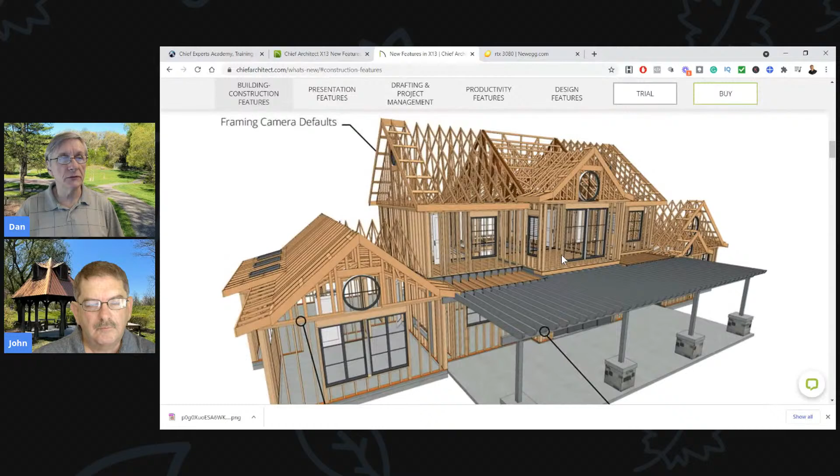This page is really nice. It talks about and shows some of the new features. They've got some really nice videos on here that will steer you in the right directions on some of the new things, and we'll refer to some of these. They've done such a wonderful job laying out some of these things, and they're just killing it as far as teaching what they're doing within the software itself. So pay attention to what they're doing and you'll learn a ton.

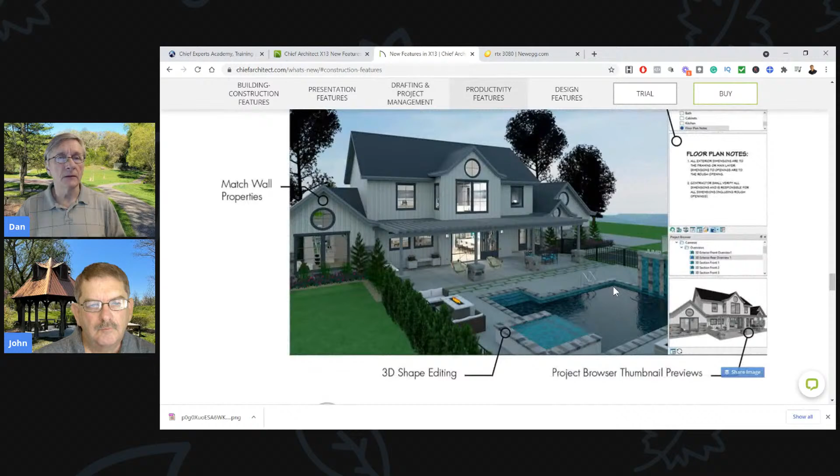We'll keep bringing you good stuff too, but pay attention to what they're doing. So there are presentation features, new things you can do on elevations, project management features. They are really listening to the users out there and doing a nice job.

Now, another thing I want you to be aware of - here's some of the system requirements. I'll talk about that for a brief second. In X13, you're going to need some new hardware if you haven't upgraded your computer to the newest video card. When you say that, Dan, are you saying you'll need new hardware to use all the features, or just new hardware in general? You'll need new hardware to use some of the new features - the software will perform the same as X12 and previous versions on your existing system.

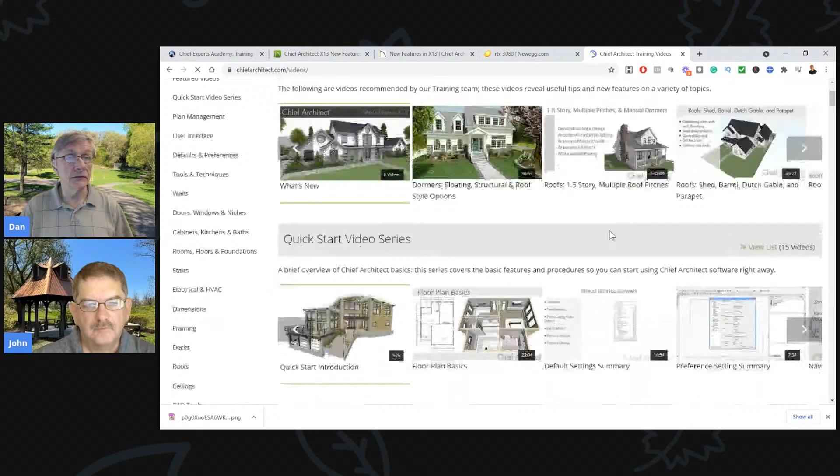So when you go to their website, go down to training videos and scroll all the way to the bottom, that's where they post their weekly shows that they're doing. And they're doing a great job there.

But there's also, what's going on there, John? You got some background noise there? There you go. Thank you.

But there's a lot of great software, a lot of great videos here that you can watch. Again, it seems like they've been doing this for a while, but especially since COVID hit, it's like they all hunkered down and just started producing a lot of great things. So they've got a great team working on all this stuff. I know there's a lot of people putting this kind of stuff together over at Chief Architect. So kudos to them for doing a great job of helping you guys learn how to use the software better.

All right, with that in mind, John, we getting any questions here? We got comments there and stuff. Yeah, Jerry wants to know about pole barns, material estimating, material per, yep.

All right, cool, so if you guys have questions, put them in there and we'll try to get to those. So what I've just done is I've taken a Word doc and I want to run through some things. We don't have much time here. So let me run through some of the things that, John, I was telling you — a lot of these are the kinds of things that as I'm using the software and I get to a point, it's like, damn, I wish Chief would do this or fix this or give us this option. They've done a lot of that in X13.

So I would give X13 a really high mark for some of the new features that they put in. So let's just kind of run through some of those. Let me get into the software here and just talk about some of those features. So let me just quickly go down here. So first of all,

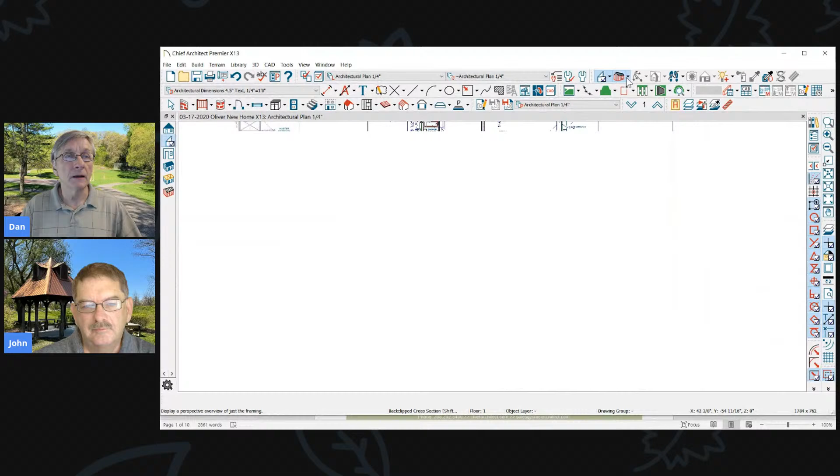Hallelujah. All right, navigation alt mode. That's just a real simple thing where when you're in a 3D view and you rotate your mouse using the right mouse button, you see how it changes the rotation up and down. So you're just getting more rotation options with that fairly simple thing. But again, it's just a nicer way to get around your 3D model.

Fill the screen to the selected objects. I didn't even realize this would be a good feature until I was exploring some of these things. So when I'm working on something in Chief, let's say I want to select the kitchen cabinets there.

So I click on, I go in here and I click on, actually let's do a light. So actually that's not what I want to do. You have to bear with me as I prepare for this. I spent about 3 hours before this going through all this stuff. I probably forgot half the stuff I was exploring when I got in there. So when you click on something like a cabinet or a group of cabinets, let's say I've selected these cabinets right here.

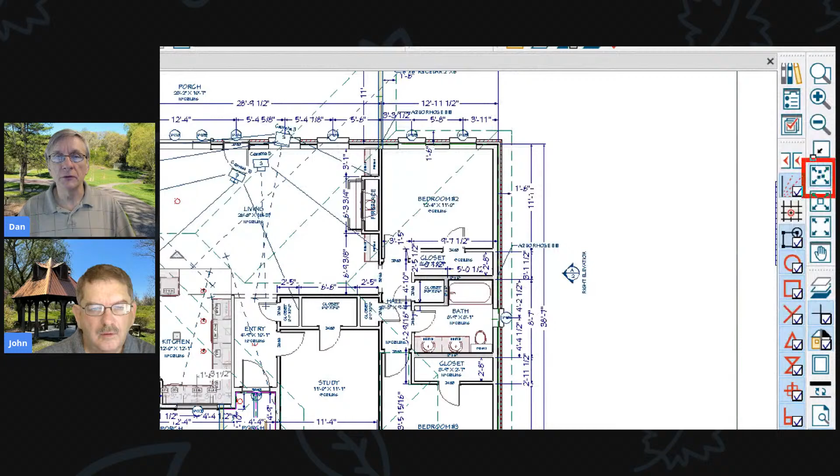There's a new zoom feature right here that allows you to zoom into your selection. Kind of a handy thing. So when I want to zoom just on the things I've selected, bam, it takes me right there. Just a little bit less scrolling in and out when you select things. So if you have a big project and you want to work on a room, click on that room and hit zoom to that selection, and you'll be right there.

That's so cool. Yeah, I like that. I think that's a good one.

All right, the polyline solid defaults. How many times have you gone into an elevation, John, and drawn a polyline to fill in a wall or something like that? And what do you get every single time when you do that?

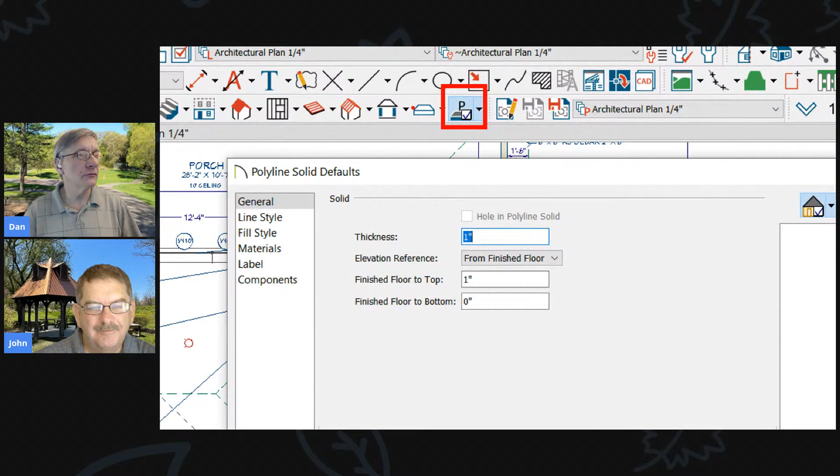Concrete slab. Yep. Well, now you can double click on the polyline tool, this tool, and this tool as well, the slab, and you can specify how thick you want it to be, where it is from the finished floor, how thick, and what kind of materials are on that thing, line style, all those different things.

So if you're working on a bunch of things, maybe a bunch of terrain or something like that, change your defaults while you're doing that and you'll be able to continue that. So what I might do is open up this box and say I want my fill style to always be solid black, and whatever else it is. Oh, that's a slab. So once you've set one the way you like it, click the little wrench icon down here, and that will make it the new default in your plan. So the next time you go draw one, that's what you'll be drawing.

So I've had that forever. I know. So if I click that and then draw another box, I guess I didn't do the fill style, let me try that again. So if I go in here, I thought I changed fill style, I must have changed the line style. So again, I'll set that as my default. So the next time I go draw one of those, it should be a solid filled black box. Bam. So that's kind of a nice feature. I like that a lot.

Not a big deal, but it's a little big deal, like a lot of these things are. These little things add up. Multi-select and edit rooms. How many times have you gone into a room, John, and highlighted a room and said, God, I wish I could change the ceiling height in a whole bunch of rooms by just selecting them, or changing some of the materials or something like that.

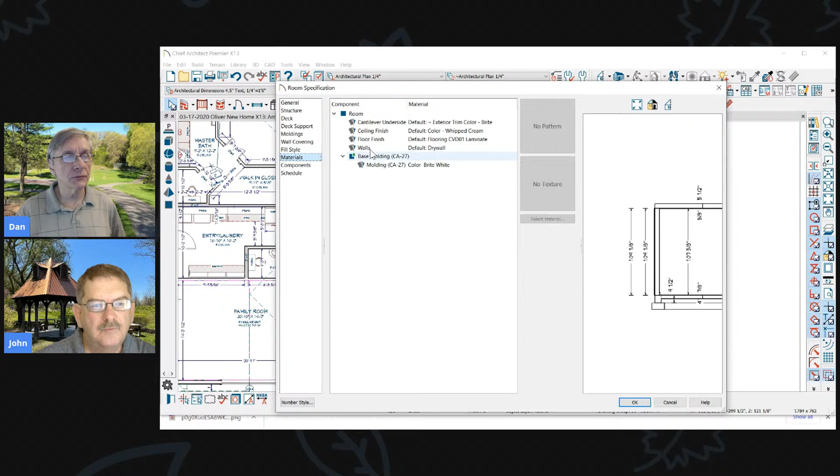So now you can group select rooms, and I could then open the dialog for those rooms, and you'll be able to edit more things: ceiling height, floor height, materials, the moldings. So we could never do that before. It's my understanding this was a pretty big deal for them to get this to work, right? So kudos to them, they got it to work. And it looks like we can also do wall coverings.

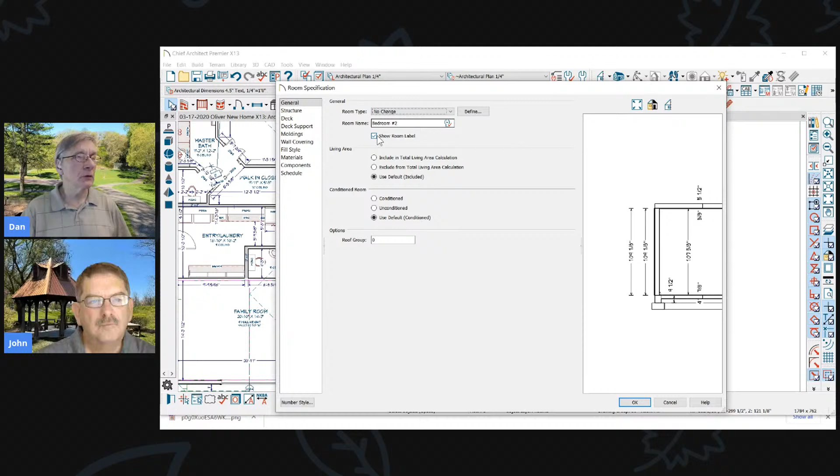We can change the fill styles for those rooms, materials. We can't change the component. Oh, we can change the schedules to what that room schedule is going to be. And so there are room names. You can change the room names. So if you want to rename a whole bunch of rooms all at once, you could do that too. So there you go, that's kind of a nice feature. I like that, group selecting of those kinds of things.

Michele asked, just to clarify, I have an NVIDIA Quadro RTX 3000. That's not good enough. It should work okay, Michele, but it's not going to be the speed of an RTX 3080. I didn't know they made an RTX 3000, that must have been an earlier release. My best thing, all I could say is get X13, bring up some renders and see what happens.

I'm not going to cover rendering, but what you would do, I'll just show you real quick to test that, is to bring up a 3D view, go to the rendering dropdown, the different types of cameras, and check physically based. I believe it's this one, and you're going to be looking for it. I don't think it'll show up on my screen because I don't have that card here. Shoot, I don't remember where it was because I wasn't going to show that today.

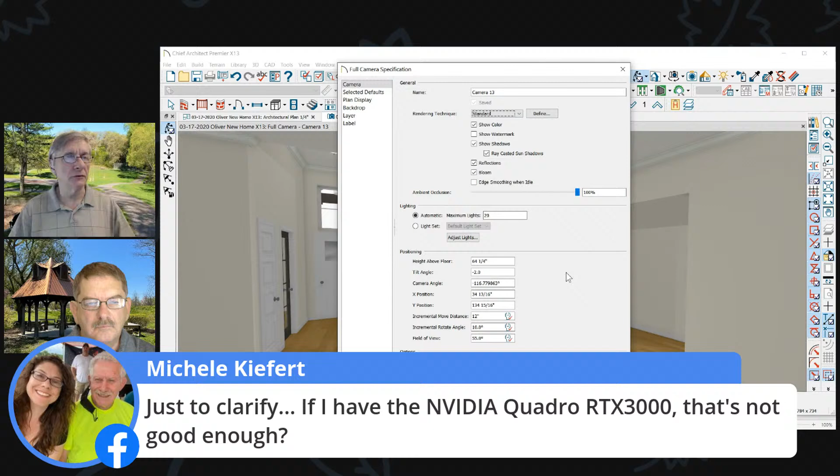You'll see it in the defaults, you'll see a thing, it'll be here. It's probably not on mine because I don't have that video card on my computer, so I can't run that kind of option. It'll be an option here that you'll be able to show that. So if you watch some of the chief videos, they'll show you how that works, and I think they'll be able to help you a little bit more than I can, because again, I haven't been able to do any of that on my computer, and I don't do a lot of drawing on my laptop.

All right, next item that I've got on my list was match properties on walls. Use the select same wall tool to quickly do it.

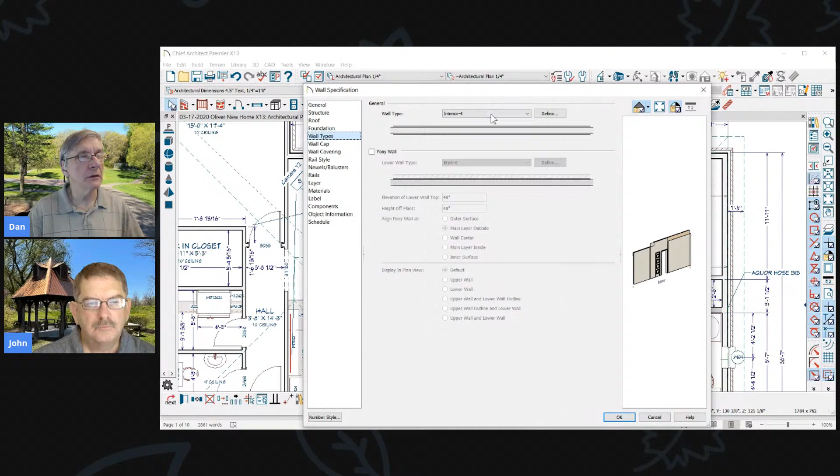Okay, so if you've drawn some walls in your plan, let's say I've gone in and I've changed a wall type here. Let's go change this wall type to something else. So I'll go to my wall types, and I'm going to change that to interior 6, right? It's not really what I wanted. So what I could do now is I could take my wall type, click on the wall types here, or the match properties tool, this little icon right here, and I could click on that wall, and I could go into my menu here, and I could say wall type would be this one right here. It's the Fire 6, which that's not really what I would do.

And now I could click on this icon. This is your little paste icon now with this wall type. So I could click that, and then I could go change other walls to the 6-inch wall just by clicking on them, changing them out. So that's really a handy little feature.

That's pretty huge for me because I've always wanted that to be able to do it with walls, but it wouldn't before. I mean, you could do the same thing by group selecting a bunch of walls and then just open the dialog and change them. But if you're in your plan and you go, oh shoot, I need those walls to be that wall—and the thing I don't like about Chief, this is one thing I wish they'd do, is put the name of the wall on the toolbar down here instead of me having to open the wall to look at what kind it is, what it's called.

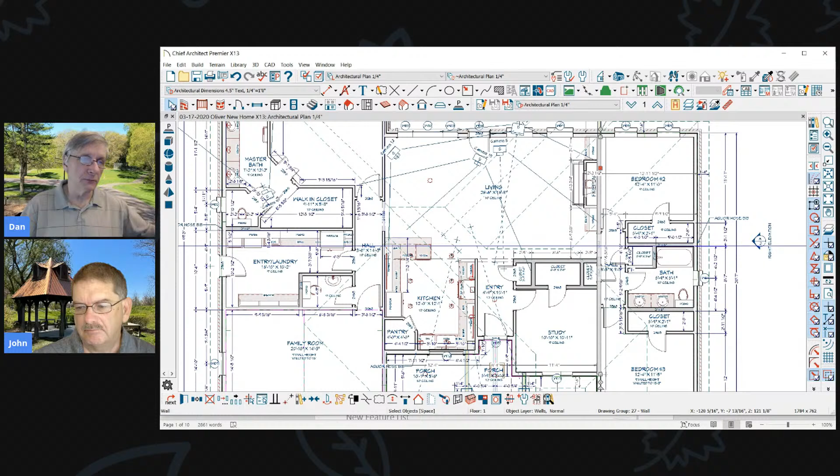But this select same wall type will make it easier just to put that somewhere else instead of having to look up the name. Anyway, so that's a new one. I like that one a lot.

Let's see, match properties, control living area label display. That's more of a, it's not a big deal, but when you want to show the living area on your plan, people will go into the layers and they'll say, well, where's the living area here? Okay, so if I search for living in my list here, there's no listing for living area. So it's one of those things Chief puts in your plan automatically, living area. And you control that by going into this icon right here, the select objects icon, or you could go to your defaults and go to plan.

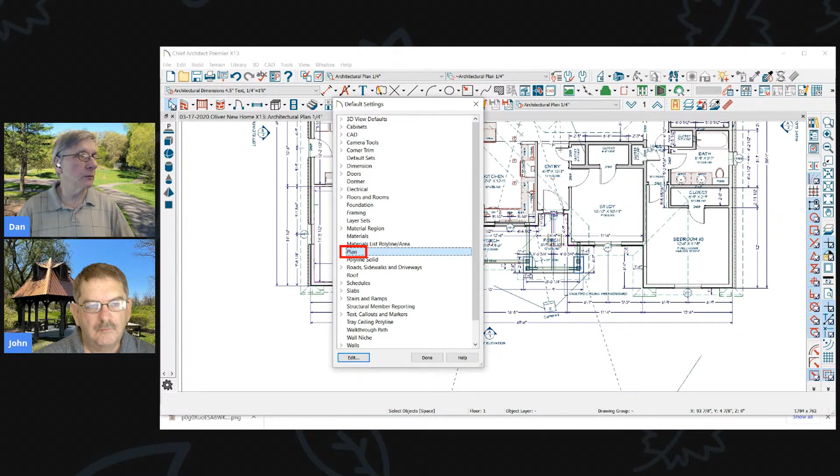This is the same as double clicking on that. So you can get there either way. When I go here at the bottom, show living area label on or off.

A lot of people just move it to the side or they put a whiteout box over it, but that's actually how you shut it off.

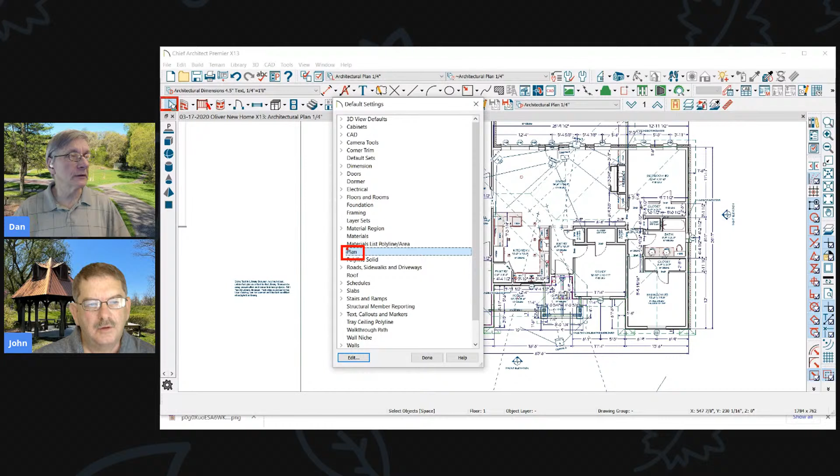What did they change about it? Because you could do that before. I think what they changed is they added this into the defaults area. I don't think a lot of people realized you could actually click on that icon. I think that's probably something tech support got a lot - how do I turn that off? Because no one could find it before. If you didn't know you could click on that icon, you had nowhere else to go to find it. Now you've got it in your defaults.

Not a big deal. And while we're on the topic, if you ever want to find out what the square footage area of that living area is - where you've got a number and want to know where they're getting that number from - this isn't new, but you would click on this. Highlight the outside of your plan and click on this icon. That will put a box over your plan showing where it's getting that living area square foot number. So when I open the dialog for that box, here's the area, and this is the same amount that would be displayed in that living area amount. It would probably say 2451 square feet because it rounds up. Anyway, just an FYI about that.

All right, refine search in library browser. How many times have you looked for a kitchen sink and couldn't find one because you got a list of 5,000 items, if you have a lot of library items loaded?

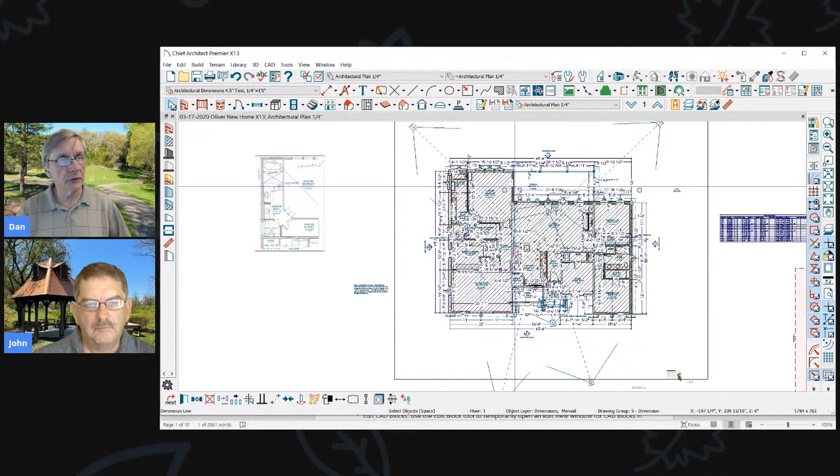So now what we can do is use and, or, not, and parentheses to refine your search. I really haven't even gotten into this at all. So when I open my library of symbols and type in kitchen sink, let's see how this works - the way I've always done it in the past. It's going to search through it. Oh, I got to put a space in there. So now it's going to search everything that finds kitchen and sink. But if I put parentheses around that, it'll narrow it down so the item has to have kitchen sink somewhere in its label, in the data's description of the object.

So now I'm getting a lot less items on my list. And if I go - I think it was 'and' - stainless steel, yeah let's try that. And kitchen... nothing. Okay, so like I said, I'm going to start researching how this works, because it's going to work a lot like a Google search, like you search for websites. You can do a lot of these same things - you can narrow down your search.

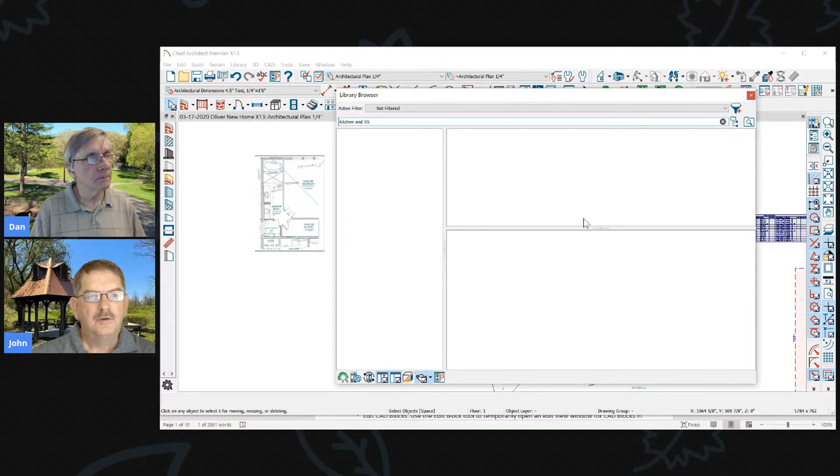SS - but you still have to spell everything perfectly. Yeah, so here it found anything with the word kitchen and SS for stainless steel. So now I'm getting stoves and all that kind of stuff. So we'll have to work on that.

But you can see that Chief has done a lot of work making it easier to find things in the libraries. There's, I think at last count, 420 libraries loaded up in my system - I need to go download, I think we've got another 10 or so that I haven't downloaded yet. So there's a lot of libraries, well over 100,000 plus items to search through when you're searching for things in Chief, and that's only going to grow and grow and grow. So we have to learn how to find things in our library a lot better. We'll keep working on that.

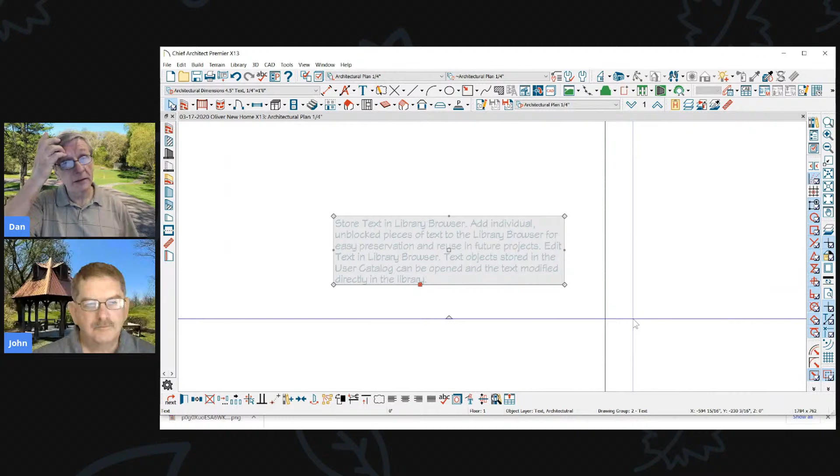Store text in the library browser. I really love this one, this is so nice. So when you're in your plan and you've got some text that you'll use again and again, it used to be you could do that by blocking it up. You'd group select it by holding your shift key down and make a block out of it, then put it in the library. Now you just click on the text and add it to the library, and now it's just in the library as text.

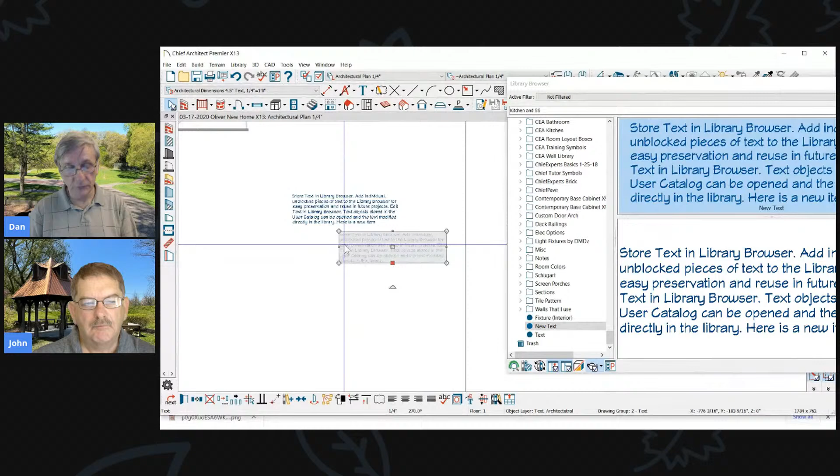What else you can do is click on the word you put here. So I'll just say, here's some new text. You can click on this over here, right click on it, and open the object from the library without having to put it in your plan. So if you need to make a modification, here's a new item - I just added that, and changed the text while it's in the library. I didn't have to put it back in the plan. Anytime you want it back in your plan, click and paste, and you've got a text box you can edit again. That's really cool. That is a nice feature - we don't have to put it in our plan, unblock it, and do all this other baloney. It's just in the library as text, out of the library as text. Nice feature, I like that one a lot.

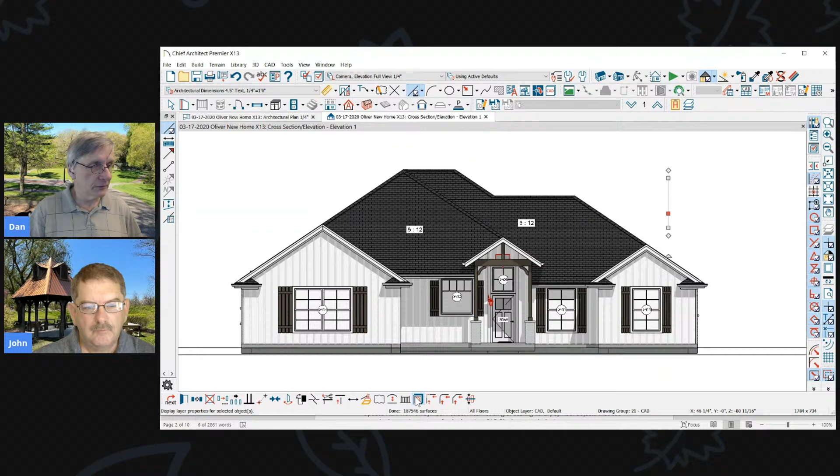Center CAD in elevation views. Okay, I'm just finding some things out here that just came to my attention. Let me show you what those are, because I could be mistaken, but I don't think I am. So when I bring up an elevation of this building, I can now draw CAD on here, and I now have all of the same CAD tools I have in my plan. I have trim and extend - so if I wanted to trim or extend a line, I didn't even realize I couldn't do this before in an elevation view, but apparently we never used to have any of these tools in our elevation view. It shows you how much I've just gotten used to not doing that kind of stuff in elevation.

But the other thing I've noticed is if I want to draw something here, look, I got snapping now. I don't know if this is new or not, maybe I was just missing it, but there was some snapping you could do. Yeah, so it seemed like there was more. Sure, there's an endpoint there. It still seems to be missing some, but it seems to be better. So I do know we'll be able to do more snapping on cabinet elevations. So that seems to be better.

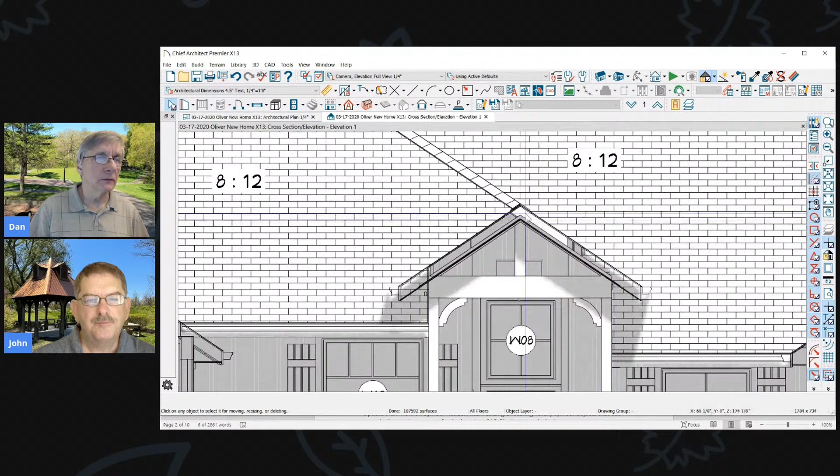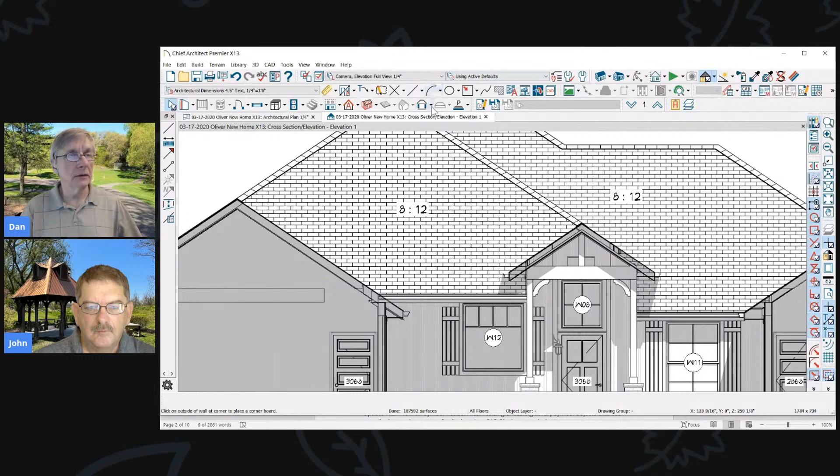What I would always tell people to do when you're working on something, like you want to draw something on this wall and you want to snap to the fascia or the soffit, is cut through the object, cut through the roof plane, so you're exposing the edges of an object. So when I turn the color off here, now I've got snapping everywhere, just like any other CAD object. Because what Chief was really doing there, my understanding, is it's actually putting a CAD line over the surface of those exposed edges. But it doesn't do that to the full elevation views, although it looks like it's doing more of it now. So anyway, it seems to be better. Not totally perfect yet, but it's better, which is better. I'll take better all day long.

There's a question about the text, putting it in the library - can you do that with rich text too? Yeah, any of the text. Okay, let me go here and try that real quick. So rich text, we'll type some text here, click OK, click on it, and hit add to library. Bam, there it is.

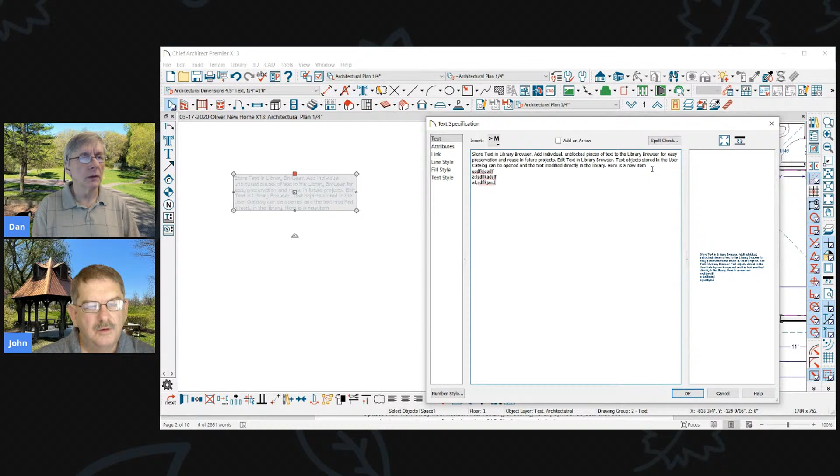And you can change that in the library too. So I could go in here and open that object and change the font, the color, the size, all the aspects. That'll be handy for making some of those schedules people like to have - their own schedules. Now, I don't know about spreadsheet kind of things, if it'll work, but the way you could do it, like here, if I go into this text and add another line and add some more lines, you could go to attributes and display the border and display it as a grid.

So you could make it look like that. And if you put a tab after each of these items, you'd have another grid. But now we can add that to the library just like that too. But it's still just a text item with the grid turned on.

So it's probably no different than if I threw a schedule in. If I went to the schedules up here and grabbed a door schedule and popped that in my plan, and I convert it to text by clicking this icon right here - schedule to text. Now I'd be able to add that to my library like that.

Now if we create that, does it change as you change things or not? No, that's not part of the plan anymore. It's just text, it's not linked at all. And I don't think we can add just a plain schedule to the library. No, we don't have any options.

Can you put a title above it, block it with a piece of text, and then put it in there? Yeah, you can still group items together, block them together, that kind of thing. Can you block a schedule and some text together and put that in the library? Yeah... no, I misunderstood you. I don't think so. Let's find out.

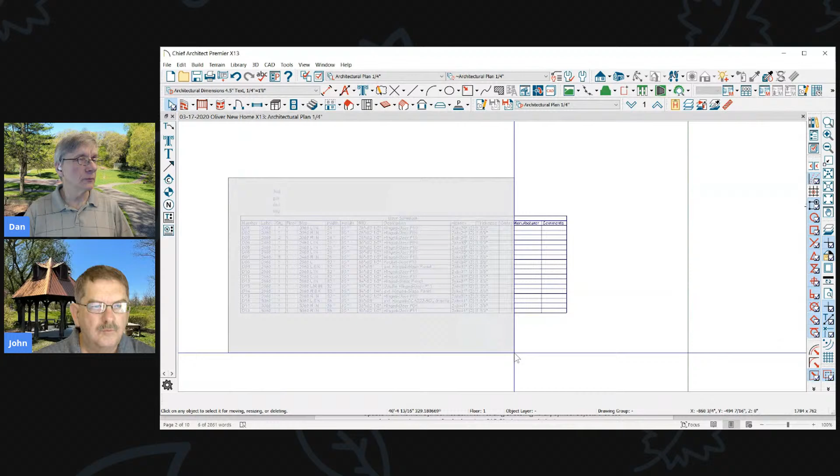Because the schedule is going to be a live item. So there's some text, I'll group them together - no, actually block it. And if I select the block and add to the library, it got the text but not the schedule. Yeah, that's right.

Can notes be added to the library? Notes, can they be added to the library? I doubt it. Let's find out.

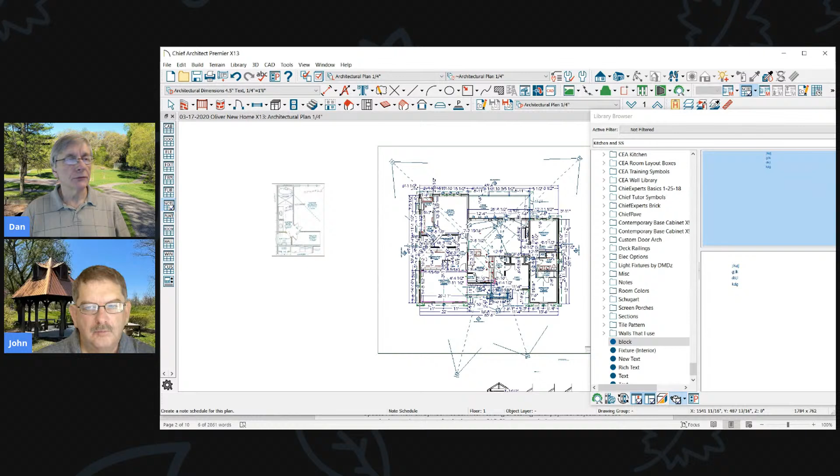Let's go add a note schedule. All right, schedules, note schedule, click here. Let's go add some notes. I must have a note schedule here in one of these views, let me go to it. Let me go kitchen and bath. Yeah, here I've got a kitchen and bath note schedule right there. Let me go add a note.

Okay, click on that, block it. No... oh, let's see, what does it do? It added the schedule, but not the notes that are part of it. But it'll put those notes back in when I put it here. So kind of - I guess we could experiment with that one a little bit.

It'd be nice if we could set up a bunch of different ones. How about the individual note, like the number - what if you save that to the library, what would happen with that?

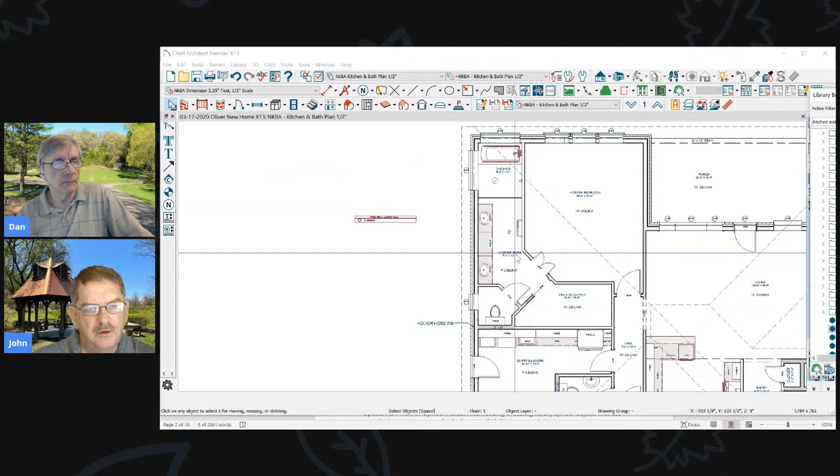Oh no, I don't think I typed any text. No, I did type some text. Because we don't have a number there. I'm not sure. It did - it added the note itself, but not the... bring that back in, does it put the... so it did bring it back in. So yeah, maybe it might be something worth looking at if that's something people do.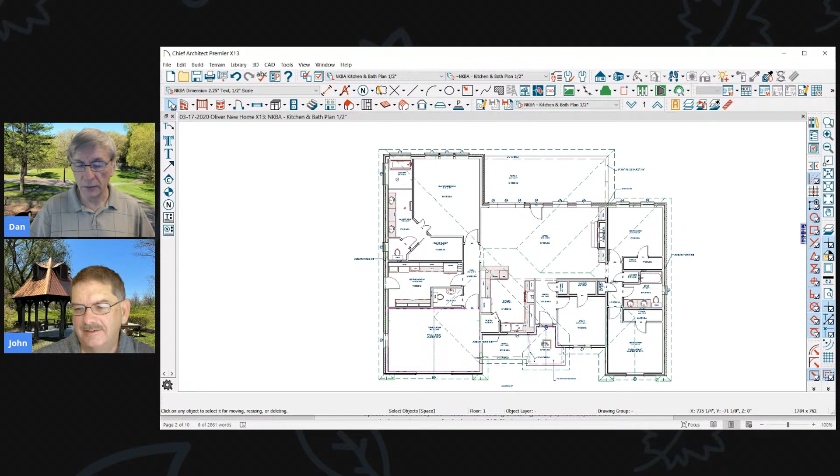I could see this adding text to the library thing being a big deal for the layout when you want to do all sorts of different callouts and things like that on your elevations and all this kind of stuff.

So, MM2's comment there at the end - it's fun seeing all you kids. Told you, the candy store, Mike. All this new toy, yeah. This is kind of like watching my kids on their gaming stuff, because they - why won't the note go off? Yeah, I mean they'll watch YouTube videos on how to run their games better, and it's just, yeah, so this is our form of gaming.

Add text to library, center CAD and elevation, copy and center objects - I don't remember that one. Trim and extend CAD and elevation view, talked about that a little bit. Slab defaults, we talked about that. Convert planes to polylines - this is really a big deal for me, even a big little deal.

It's not a super deal, but let me show you what that means. So have you ever had a plan where you're doing a roof layout, and you want to show all of your roof lines in one plan, but you need to keep some of your roof planes on the first floor because there's skylights in them? But if you move the roof planes up to the second floor, the skylights won't show up in the interior anymore. So those kinds of deals.

So what we could do with Chief is, let's pretend for a minute that I need this part of the roof to be on a different floor, but I want to show all my roof lines in one plan. I could select some of these roof planes and copy them to a different floor, hit copy, go up or down to a floor, paste and hold position. Then I could click this button right here, which we couldn't do before, and just change them to CAD lines.

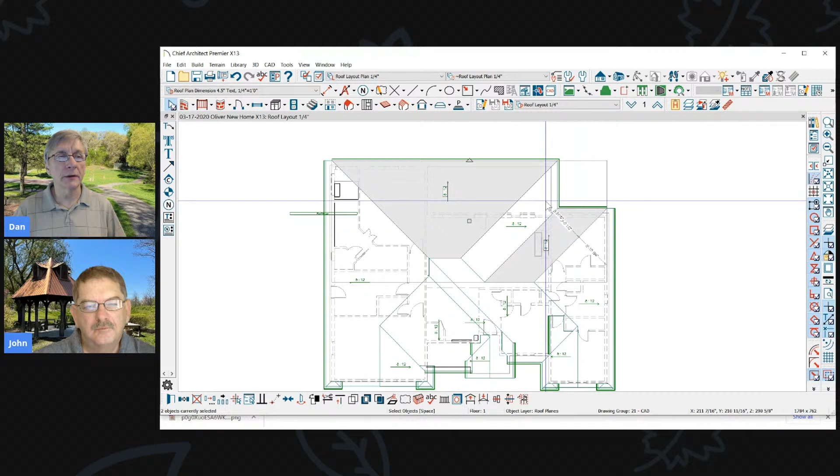Correct. So what I would do in the past sometimes is take these roof planes and copy them into a separate plan, paste, hold position, copy, then hit convert to CAD, and then copy and paste them back into my plan where I needed them. Now I've just skipped all those extra steps, so that's kind of a nice deal.

Not a big deal, but it's one of those little things someone picked up on and thought, oh yeah, that's an easy thing to add, we could do that. And you can do that from elevations for walls and stuff like that too.

No, I don't think so, I think it was just roofs. There's roofs and one other thing that was part of that. So I can't see, I don't have any of that, I don't have that ability here. Here I could probably... nope, can't do it. Can't do it here. X13, yeah, there you go. So, but just on the floor plan, we can do it.

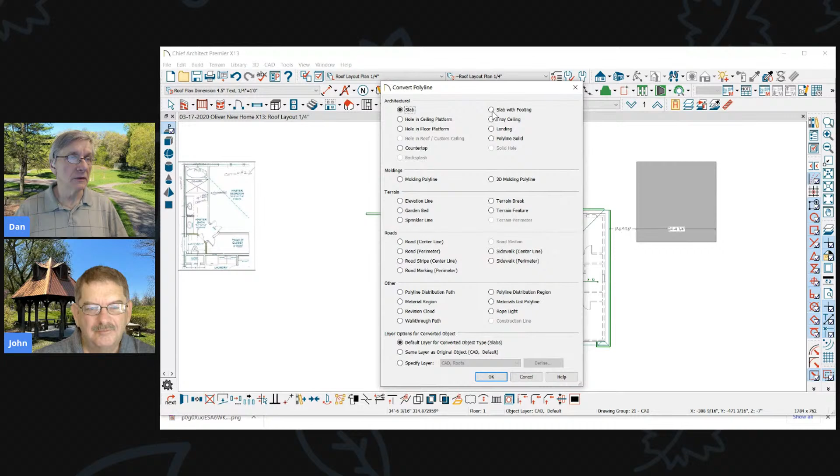Just trying to think of any other examples where that might be handy. Because we've always been able to take 3D objects and convert them back to 2D objects and then convert them to something else. I don't think I could take a roof, convert it, and then convert it back to a roof, I don't think that's part of this whole deal. No, I don't see it anywhere on here. So anyway, that's the use for something like that, a silly thing but kind of simple.

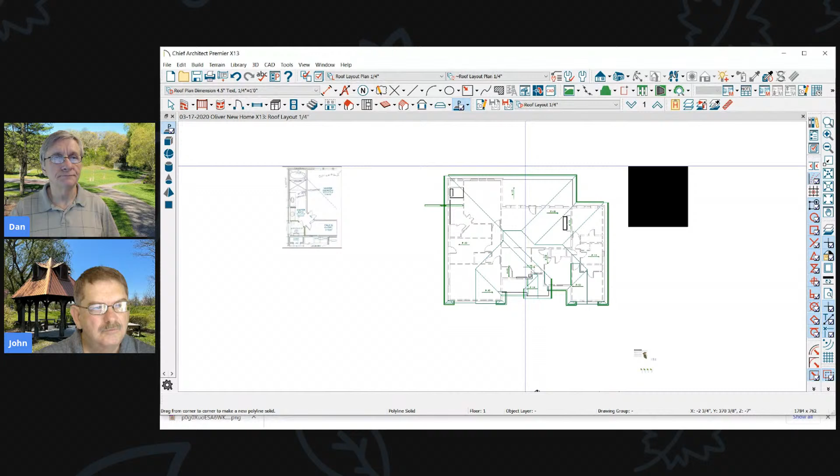3D shape editing. You guys have heard of SketchUp, where you could take a 3D shape and push and pull and make all these different changes to it. Let me open up a new plan and I'll show you this real quick. So if I draw a box here and it's going to be a 3D shape, we could do some of this in X12, but they've added a lot more functionality here in this version.

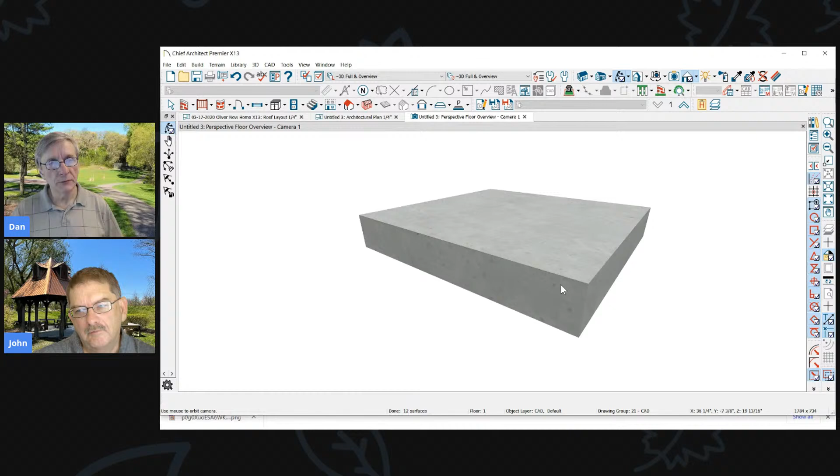So when I click this, I can make it thicker. I can click on, see how when you click you get the different faces. So when you get the different faces highlighting, you can edit those faces. If I click here, you get all these CAD tools that you didn't have before, the fillet tool, for example, the chamfer tool, and some other tools will show up that weren't there before.

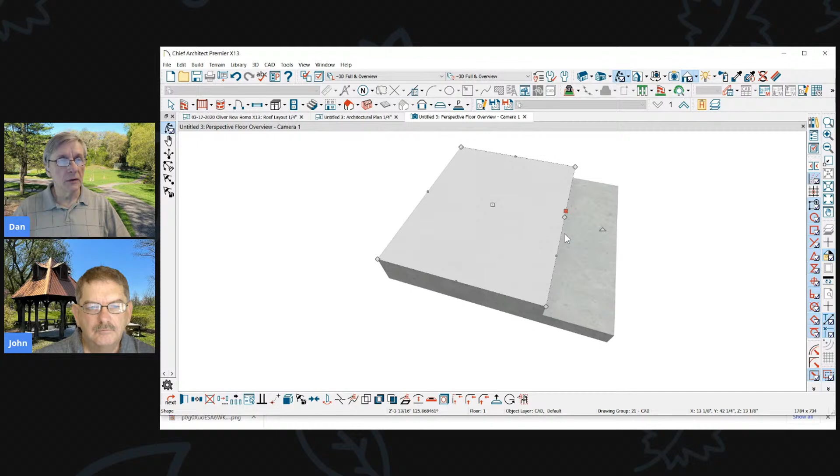So now what I could do is put a break here and step this down. I could go here, and if I wanted to, I could throw some breaks in here. I could put a break here and a break here and pull that out. Right, so I can start doing those kinds of things.

So like a front porch where it comes out and around like that, if I wanted to I could even put a break here and pull that out like a step almost. So you could do that all in one piece now, instead of a whole bunch of little pieces. You could also do things like, since you have the fillet tool available, let's say I want a nice little rounded corner here, I could do that.

So just a lot more flexibility in creating these shapes out of CAD boxes. And again, we had some of that before, but nothing like this. Put that rounded corner on that step there.

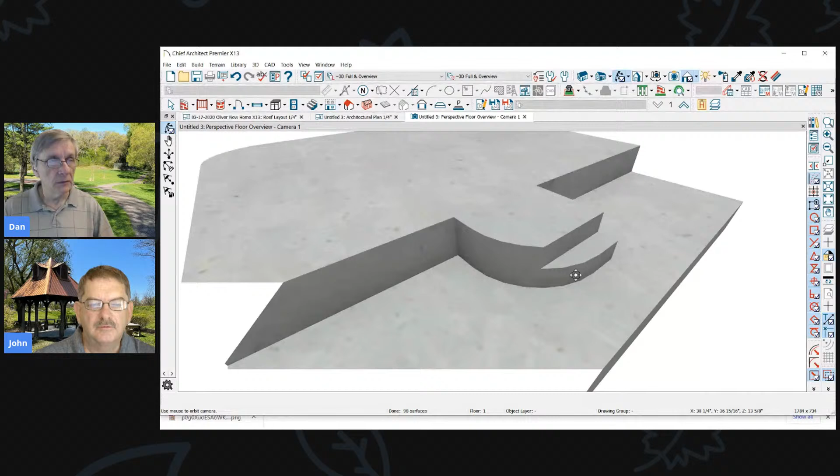It won't work there. Once I change a face, I wasn't able to get that to work. Let's see if I take it back. So it did the whole thing. Let's see if just the top layer. See if I could do a smaller one.

Let's go with 2 inches. So if I highlight this, let's try like this. Let's put that fillet right there. Oh, look at that. It did work. Cool, it's a kind of a goofy step, but you get the idea. And that sure seems like a lot more than a 2-inch radius. So I'd have to go look at that. But again, those abilities have gotten a lot better.

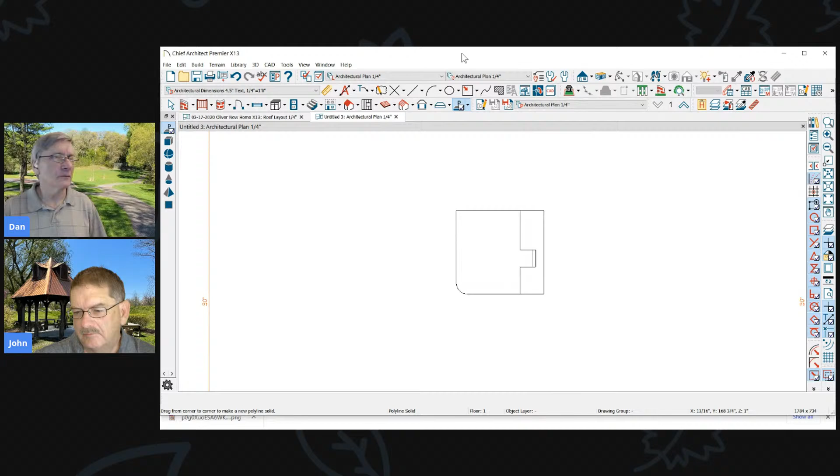I've created some projects in the past where I could have used some of this stuff so badly. And if I would have known Revit, I would have just done it in Revit, but I didn't know Revit at the time. Of course, I still don't know Revit. I don't use Revit. All right, so that's a new one I like.

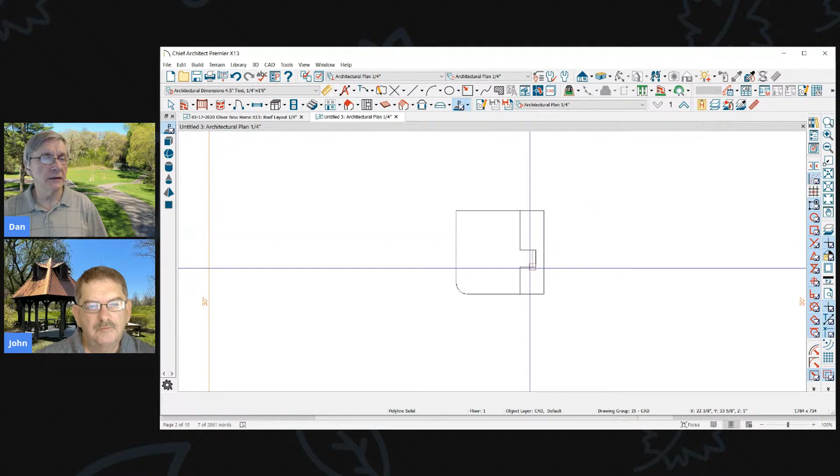That's easier than SketchUp. Maybe. I mean, SketchUp has got a lot of tools, and you can do all this 3D measuring stuff. I don't see any of that in here yet. So where I could add dimensions to those views and things like that, you could do all of that in SketchUp, but you can't here. So if I go back into this view, with SketchUp I could click on the ruler icon and dimension these different elements. Can't do that here.

And the other thing that they've added is the ability to, let's say I need to cut a hole in here, but only 6 inches deep. Before I would have to make that into a solid. Chief has these tools that, see, where did that go? I don't see it here. There's a tool that you could convert this to a solid. What solid means is that it's going to always be this shape. You can only add and subtract from it.

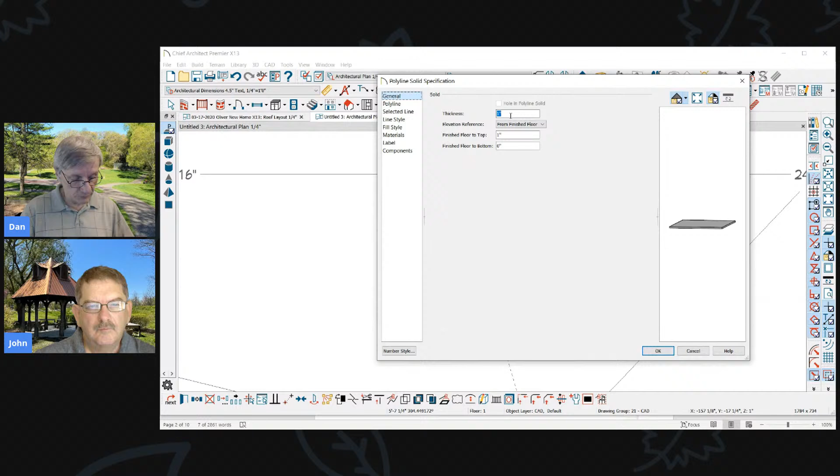But here I could go in here and let's go draw another box on top of that item right here. So I'll just draw a box. Maybe I could have done this in the other view, but I'm just going to open it and make that box 36 inches tall. And when I go back here, where'd it go? What did I do to it? Hey, where'd it go? Is it down inside the other one? I don't know, let's find out. So if I go delete a surface, oh yeah, there it is. I didn't make it 30, I moved it. I didn't make it 36 inches.

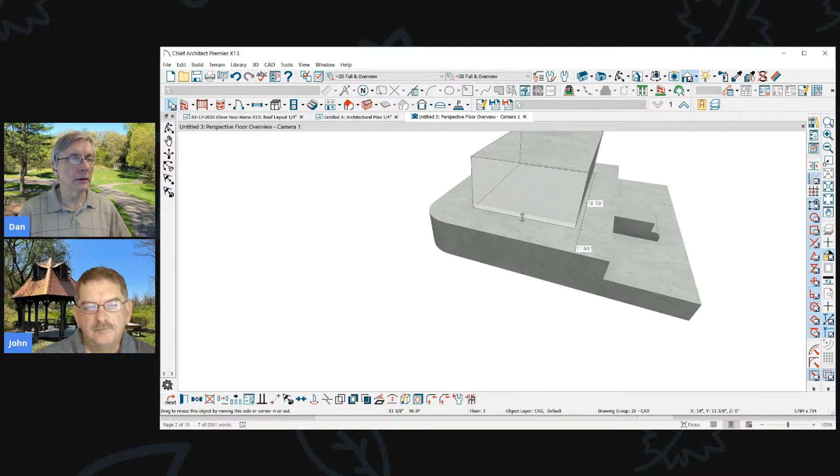So if I go up here now, I just want to go into this a little bit. I could click on the object I want to keep, click on this tool right here, which is called subtraction. I'm going to subtract this box from that. So subtraction, and then I click on that box, and I'm going to say no, don't retain the original. And now I've created an indentation in there like that. So you could do that. Maybe you're doing a fireplace and you want to do some intricate brickwork or something. So it's just different applications where you'd use something like this. Maybe not a lot, but again, I'm liking that Chief is giving this flexibility in the software to be able to do those kinds of things.

Group selected electrical items by type. That's a simple thing, but have you ever gone into a plan and tried to select all the outlets in a plan so you could put them on a different layer or change the size of them, or do something to them? Well, now with Chief, what I could do is say I want to select those — say I've got a bunch of recessed lights in my plan I want to select, and there's other electrical around there. I only want to select those. So let's click on one of those recessed cans.

So anything else that's like that - when I click on this marquee object and hold shift down to draw a marquee over this, the only thing I get are those cans. There was one over the sink too, but I didn't get the outlets, didn't get anything else. Nice little feature. So sometimes when I'm doing an as-built, I want to group select some of the existing electrical, so I could put it on a different layer to turn it on and off. This would be a real nice tool to do that.

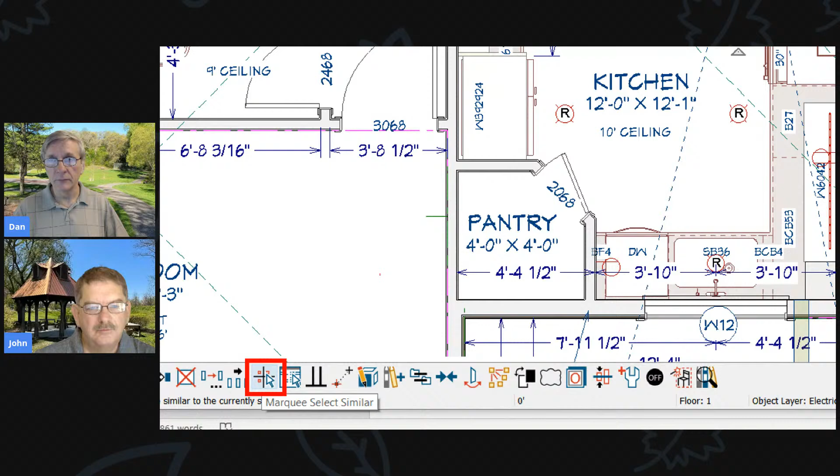So John, I've become a true believer in this little icon down here. It took me a while, but now I understand how it works, and it works well.

So most of these other things, in the past, we could click on any of the electrical items and draw a marquee around it, and we get anything that's electrical. Now we can dial it down into certain items that are electrical. But this still works - if you do the doors, you get all the doors. If you do the windows, you get all the windows. So those kinds of things.

All right, any questions? Great - yeah, Mike says he's got a free weekend to study this. All right, this video is perfectly timed. You're welcome. And again, go check out some of Chief's videos.

And I always just speed them up, double time or 1.75, and I can pretty much click, get everything that they're talking about.

So if you ever put outlets in and you need to change some to GFI, you used to have to go to the library, find a GFI outlet, and put it back in the plan - one of those stupid little things. Now you just click on the outlet or outlets - come on, get to that outlet, would you? All right, click over here. So there's the outlet. You got a little icon down there. This will make it a GFI or plain.

So I can click on an outlet and I got a little icon down here now - make it a GFI or make it a plain outlet. So you can go back and forth, kind of like making a wall a gable or a hip - same kind of a deal. They just made that option because that's something people do all the time.

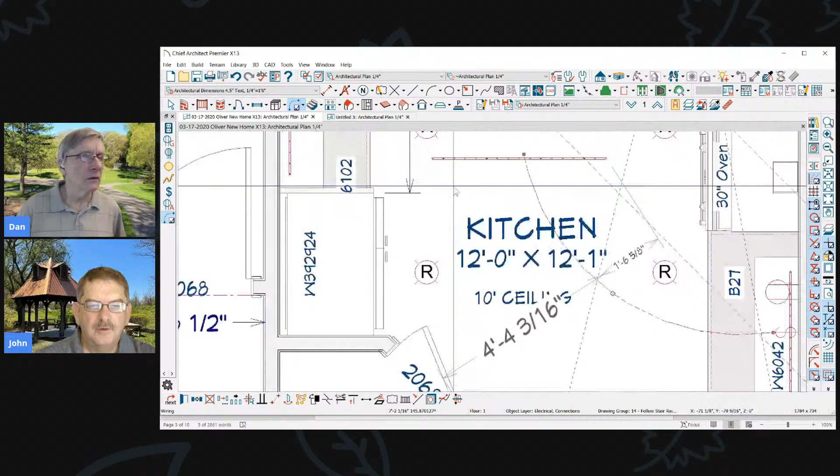And then rope light electrical connection - again, that's pretty self-explanatory when you get into Chief and you've added the rope light that they've got here. So that's just a CAD line with lights on it. You never used to be able to hook that up to a switch - you'd have to use a CAD line. Now you can use the connect electrical to that particular item, and you'll have that in your plan. There you go - so that's a silly little thing, but it makes a big deal.

Makes a big difference, because now I don't have to go draw a CAD line, put it on an electrical layer, stretch it over to that item, snap it into place. Now I can just do it like all the rest of the electrical in the plan.

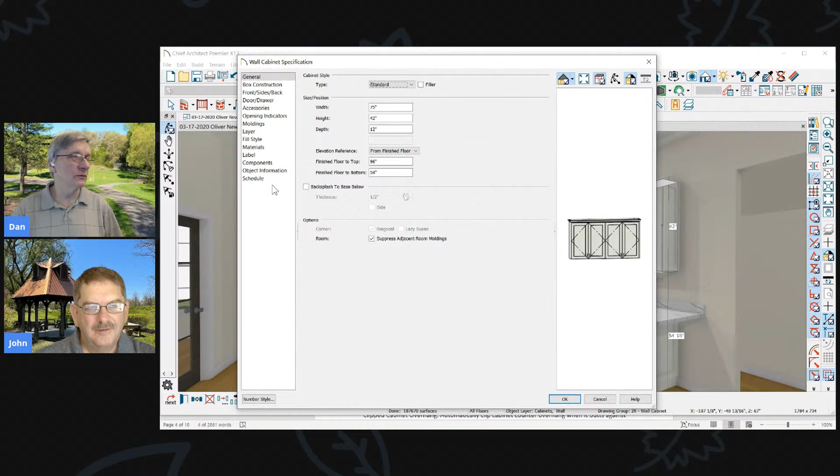All right, let's keep moving down here. Search plan materials - this is one that's like, when I saw this, I go 'holy frickin' hallelujah,' because that's been bugging me forever. You know how when you're working on a plan and you click on a material - so I click on a material here and open the item and I need to replace it with something else. So I go to materials and click on something, go select a material, and then I got to scroll down the list till I find what it is I'm looking for.

All right, well now I can just go up here and go wood - there's all my woods. Or I could go color - okay, we got a search function now. That's a big deal. It's a little big deal.

It would drive me nuts because half the time the name would... they would name their materials red brick. So you wouldn't know that. So you'd come to the list looking for the brick, go to B's looking for bricks, but it'd be named red brick.

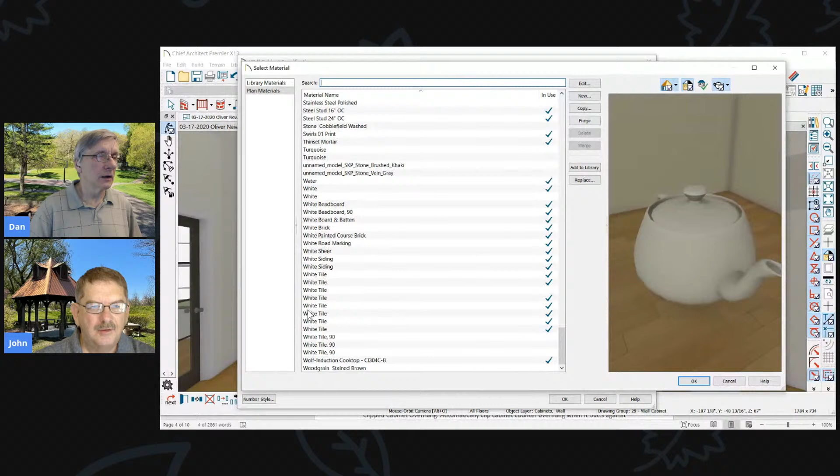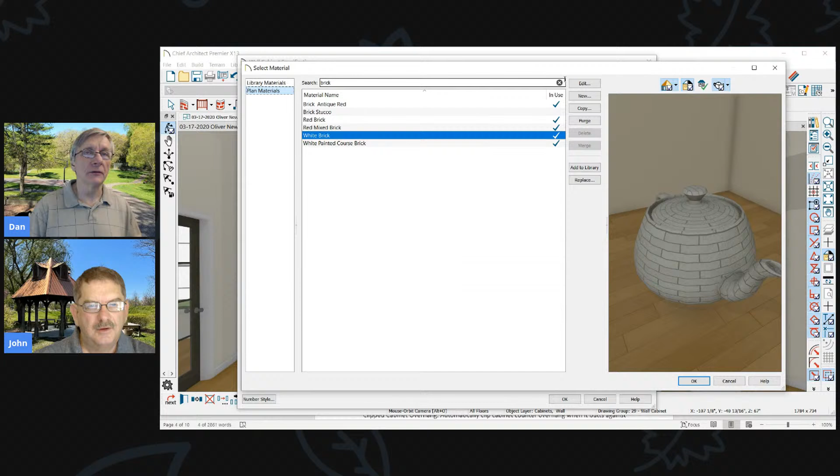So anything you put in there, if it says red brick and you type in brick, it'll bring up that, anything with the word brick in it. So it's a little search function, just like when you're searching for a material in the libraries. Now you can search from the plan itself. It's a simple little thing, but it's a big deal to me.

Excuse me, when I'm replacing those materials in a plan. All right, let's see here, what else do I got?

Material eyedropper copy tool. How many times have you opened a plan and clicked on the rainbow tool? There are two things about this tool I want to talk about. So I click on that material and I want to change it, but I want to keep this one and make another that goes a different angle. It used to be I could change the color here, change the size, but I couldn't make a copy of it.

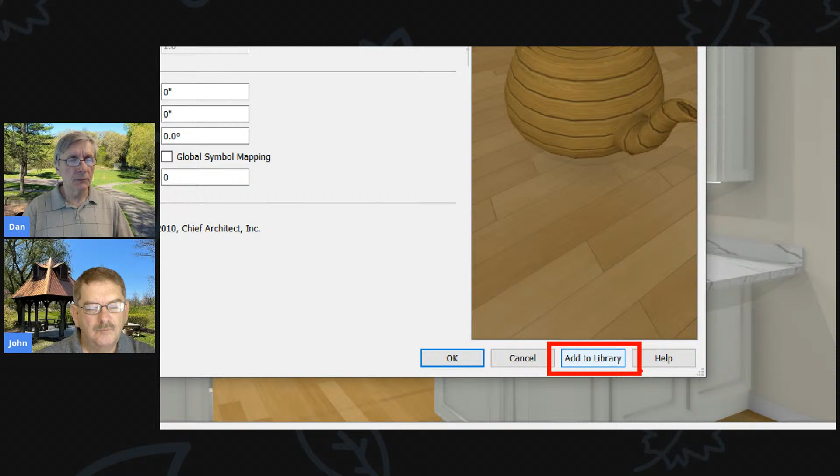Now I can add it to the library. So I make this, put it in my library. Now I put that material in the library, and I'm going to rotate it 90 degrees. I rename it here, so now I'm defining how the material is going to be in my library.

I'm not changing the material that's part of the plan right now. I'll just change the angle of the strip. So let me change the angle here. Why they have those separate, I'll never know. I've just changed that and now it's put it in my library. The existing material is the same... oh no, it did change it. So I should have it in my library. Okay, so I did the wrong thing.

You put the material in your library, then you should go over here. In my library, I can open the object and edit it from there. Then I can put this back in my plan. So if I want this material from my library, there's that one.

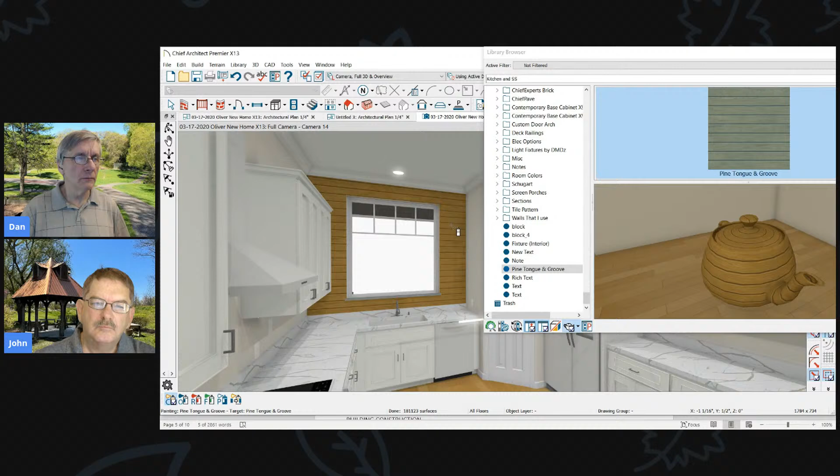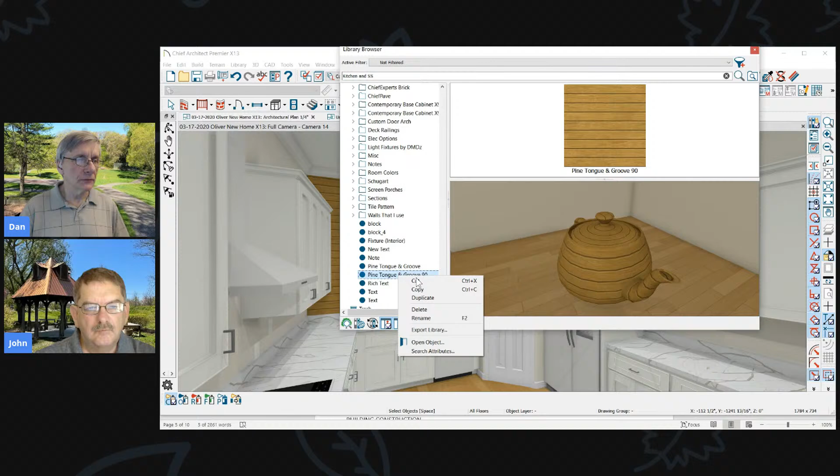Let's say I copy that again. I'll go back into this and make another copy, I showed you that a little bit wrong. Now I'm going to add this to the library. So here's the one in my library, I should close this, go to my library, and edit this one. I'll change the name here, then click on this and open the object, make my changes to it, and put it anywhere back in my plan.

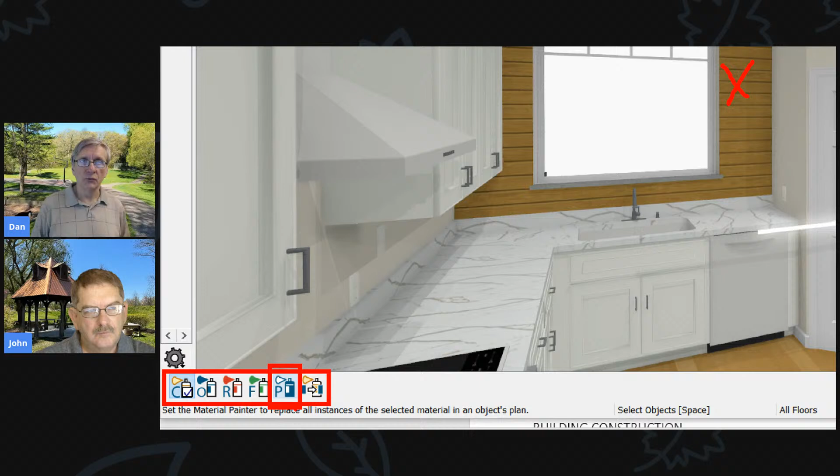I could go here and change the angle, and now I've changed the way the board's going. So I've got that material now, and not only can I paste it back onto that surface, I now have this full complement of scoping tools down here. So if any material in my plan was using that, I could click the P for entire plan, and it would change everything in my plan using that material before, or in this case just a component.

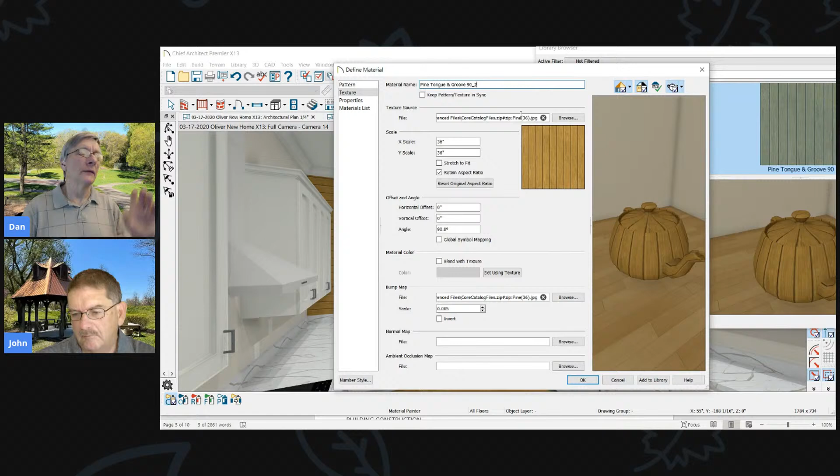I have to go look again, I don't remember what the spray can tool is for. What does that one say? Create a copy. Oh, this is another way to create a copy of a material. Use that and it'll make a copy within your plan. Ah, that's what it was. So that's another way to make a copy of the material. There are two ways to do it.

So you go into the select material thing and hit make a copy. That's right, I haven't used that one before, seems to be new, or I just discovered it. Now I've got two of those materials in the same plan, and I could rotate this, and it's part of the same plan, not in my library. So this one just keeps it in your plan, the other adds it to your library. Two ways to do it instead of none before, because the way we had to do it before was to click on the material and go into the object.

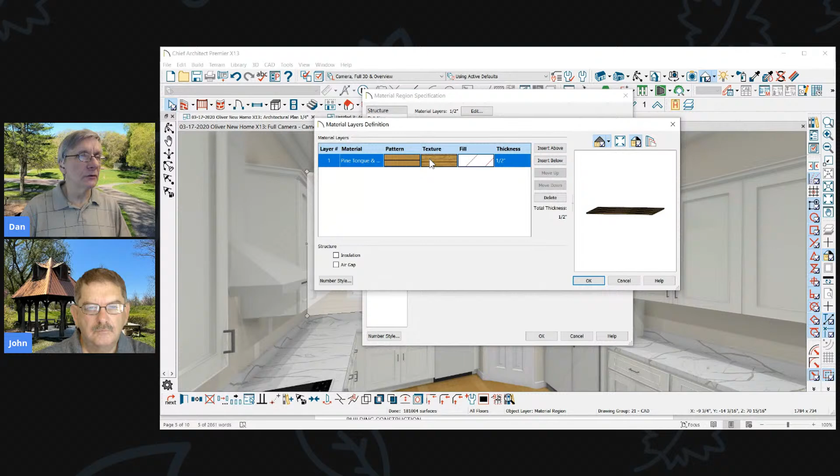That's not the material, that's the material region. We'd have to go into edit that material, then make a copy of the material, and go through all these extra steps, then put it on the item. It was a real pain in the butt. So that saved it, taking out a half a dozen to a dozen steps - it took out a bunch of steps, exactly.

And that's that adjust material scoping, that's what I was showing you down there. A couple more things, and we're just about out of time. This goes fast when we do this kind of thing.

What do we got here? Bill Murray says big deal to him as well. Yep, I agree. Mike, I like the different style sets for kitchens. Does this work for exterior finishes, like a brick option lap siding?

You're talking about style palettes, Mike. I don't think they've added anything for exteriors for style palettes. If I click on the outside of a plan... maybe. So here we've got the style palette icon. I've clicked on the outside of the plan, and I'll click the style palette and see what we come up with. So we've got add an object, so we're able to add the walls. I don't know if we were able to add that before - I don't remember.

So it doesn't look like we can do a ton with that. Now I could click on that and add more things to it probably, which is kind of nice, maybe. I don't know, we'd have to play with that one, Mike. Not sure.

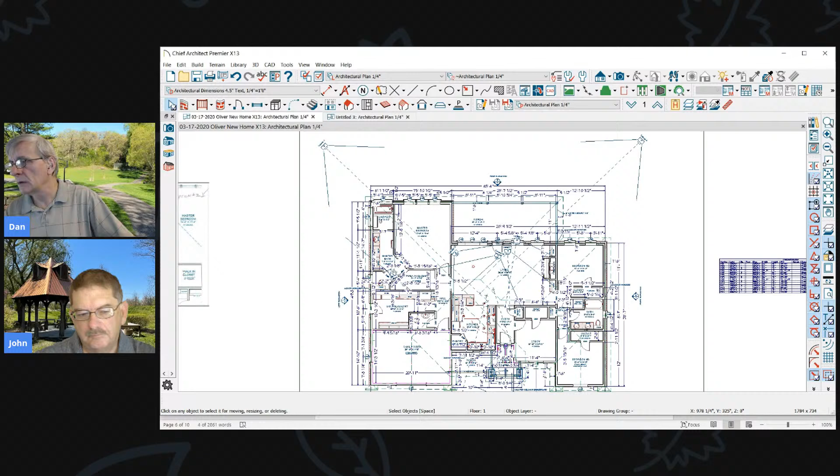Don't have the paint copy option - you add it to the toolbar. Again, this is an X13 thing. Make sure, I've switched to the toolbar configuration called extended tool configuration. My toolbar hasn't crashed once yet.

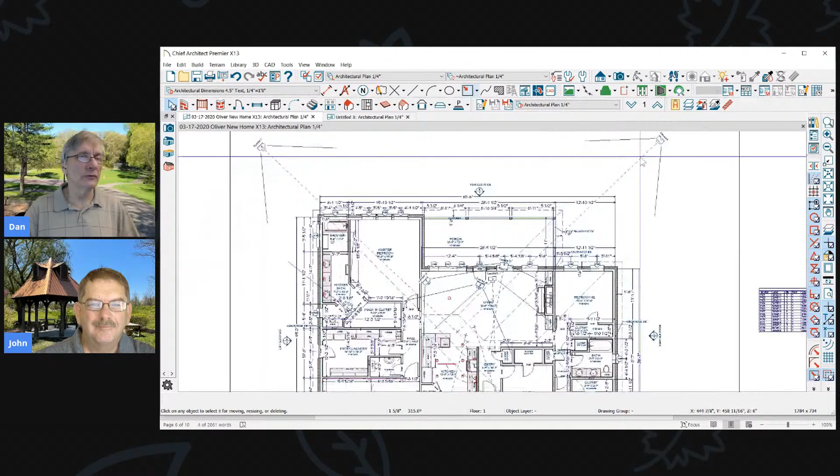The way I got to that item was to go into a 3D view where you can see a material. Select the material eyedropper, click on a material - there's that copy button right there - to make a copy of the material within the plan you're working on. Or use the rainbow tool, click on the material, add this material to your library, where you can keep different materials you use for your plans, and then go edit them in the library as well. Two nice ways to create materials.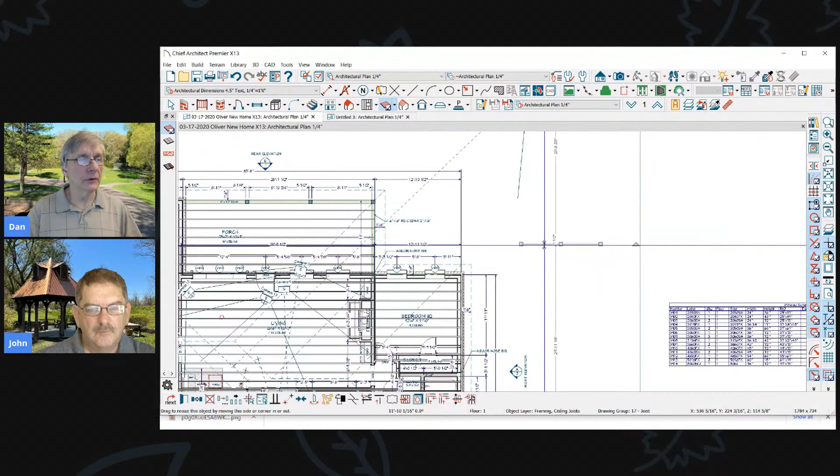All right, got time for a couple more maybe. What else do I got? Cut framing along angles - again, a silly little thing, but in the past when we would do framing in our plans and create a bunch of framing items... Actually, let me go undo that. Go to my framing plan. You see the text size has changed - they changed the way their fonts look in the program too.

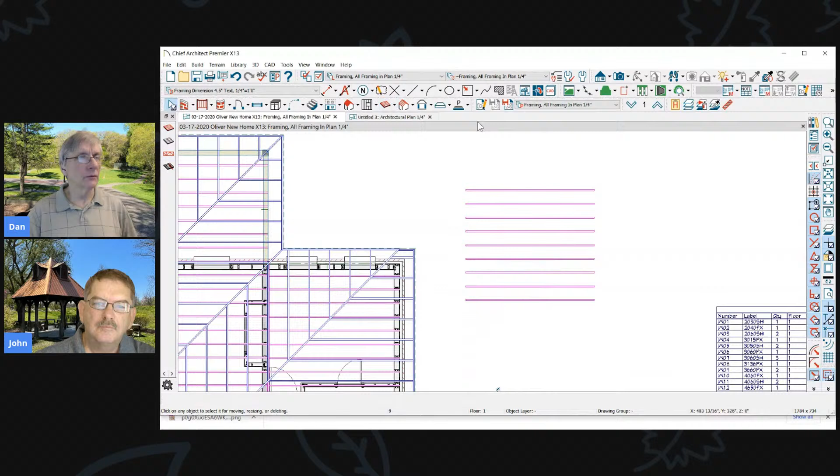All right, so I'm going to add some joists here, copy those, do a multiple copy, offset them, make a copy. It used to be when I would draw a line and trim those off, the ends of the boards would trim square. Okay, so when I do that now, they trim at an angle. Now I could have drawn a joist over there and it would have trimmed them that way. Now I can just use a line. So that's kind of a silly little thing, but now you don't have to think about it.

It just occurred to me, you know how we draw tiles sometimes using a polyline solid? We can do that with framing now, if you wanted to draw a whole bunch of them and then trim it to a different... I'm going to bet that, no we can't. How about - because that's a different kind of a box. So let's go, same box, you just have to resize it and then do multiple copies. Well, framing is a different kind of a box than all the other kinds of boxes in Chief.

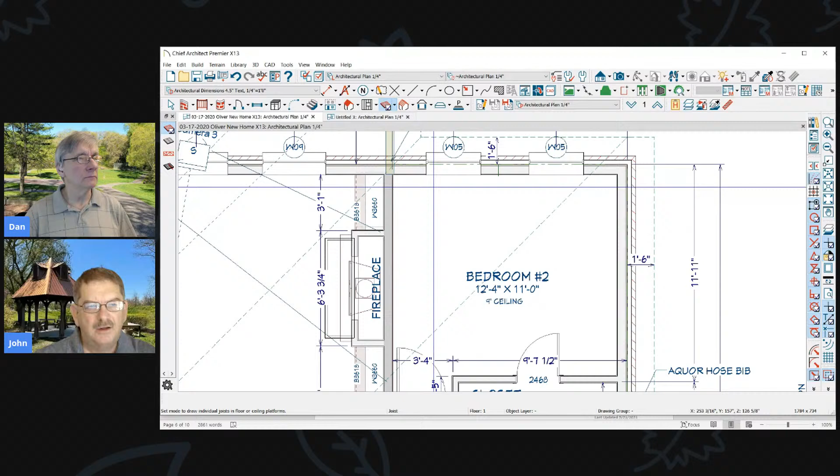So all right, if I went to - I could try something here where we might go to a floor material region. That's because there's kind of a box too. So if I made a bunch of those, I'm not going to adjust the sizing at all.

And I tried to trim those at an angle. Can I do it? I doubt it. See, I got the trim tool and I can swipe over the edges here. Doesn't do it, so that would have been cool. So close. But that's kind of frustrating when you do all this tile work and then you got to trim it down, and you got to adjust each one of these, fix all the poly lines. So now I got to make that the same angle and pull it onto it and then do the same thing. Yeah, exactly.

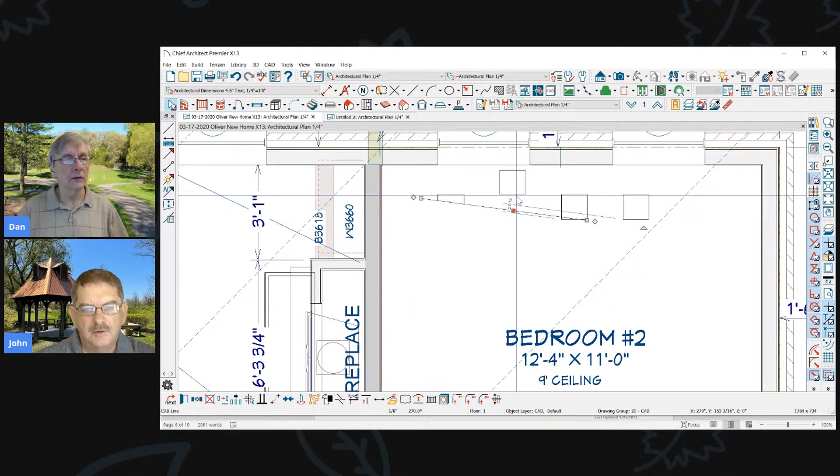So the trim and extend does not seem to work with those kinds of items. If I were to go here and try to extend that out to this line, I click on the line, try to extend that out to the line. Yeah, nothing happens. So that would have been cool. That was close. We keep wishing.

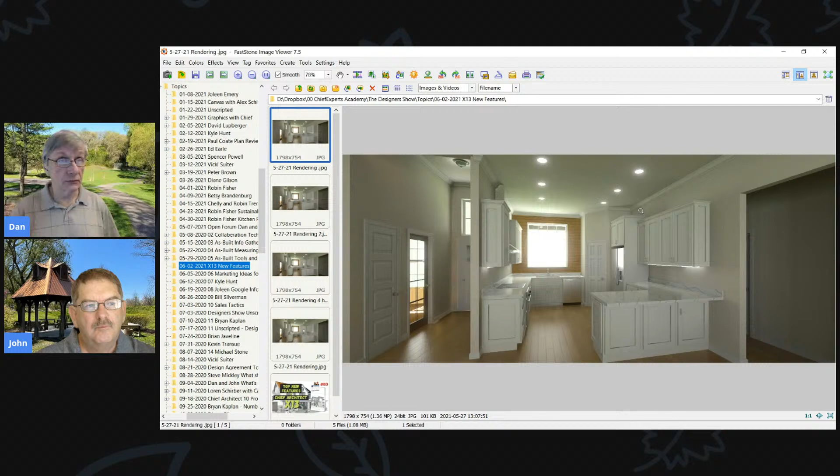Physically based rendering, we talked about that a little bit. I did a couple of quick renders with it on my laptop. This took about 10 minutes. I put some can lights in and a strip light, and I didn't do anything else. I just brought up a view. I didn't adjust anything else. No lighting, no materials. This is just what I had created in X12, and it looks nice.

Once I can figure out how to adjust the lighting, it's going to look a lot better. And when I compare this one, which took a few minutes, to one I just let my laptop sit for 4 hours, there's no difference. So in just a few minutes it did a nice job. It got me to really good looking views. So I'm looking forward to working with that some more.

We're about out of time. We are out of time.

There's a ton of dimensioning things that they've added. So this is really worth paying attention to, because now we can dimension the face of cabinets and cabinet doors when you're in your elevation. So those of you that do kitchen elevations, you're going to love that.

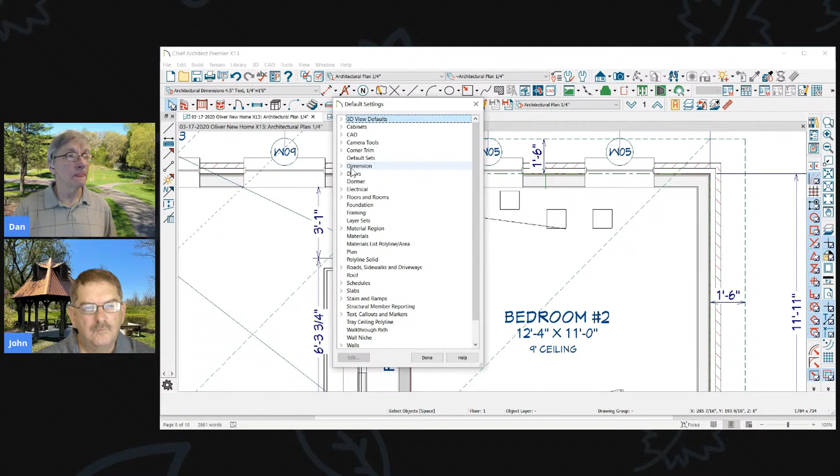We've got automatic dimension features for everything now. So when we go into our dimension defaults and look at one of our default dimension types, look at all the options we have now. It used to be we had general, locate, and primary, and a few of these other ones. Now we can set all of our automatic dimensions.

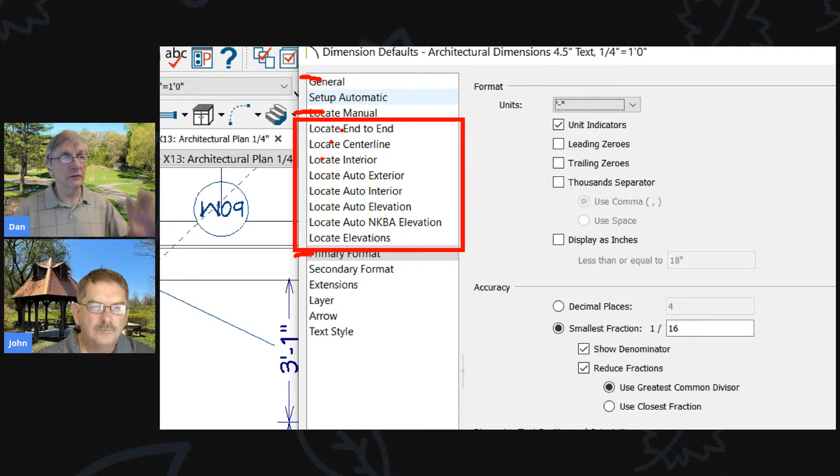First of all, we can set our locate items for each individual kind of item. So how do we want to locate center lines, interiors? I'm going to take a little time to play with this. This is pretty cool. But the automatic dimensions, it used to be we had one automatic dimensions default, so it was that or nothing. And then you had to put all those dimensions on different layers.

Now we can do automatic dimensions for our floor plan. We can do automatic dimensions for our framing. We do automatic for room types, kitchen types. So we got total flexibility with how we do all of our automatic dimensions. Big deal, that's going to be a real big game changer for dimensioning things.

Dimensions, thresholds, rotating dimensions, angle dimensions, arrow fill color by layer. Now there's a silly little thing. So when you would put an arrowhead on something and you'd have a layer set to red, and you'd put that on a layer, the arrowhead would be a different color. So now you had to go in and change the arrowhead color separately. Now the arrowhead will fill based on the layer it's on. That's a nice little deal.

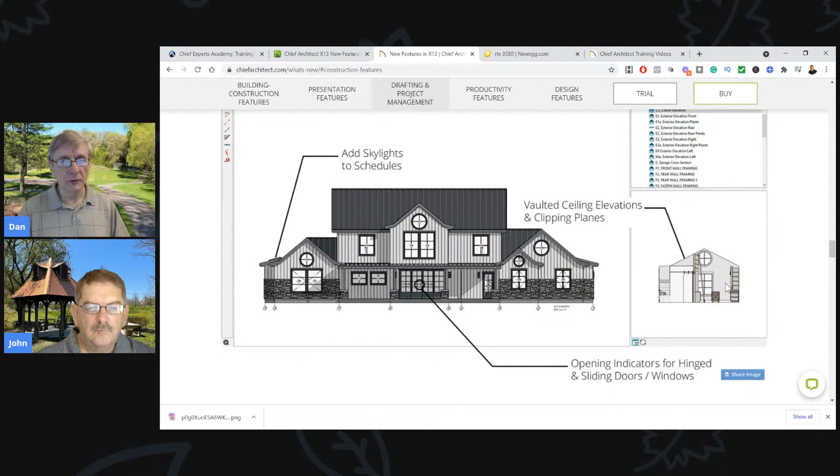Camera view setting, that's kind of a deal. If I go back to the chief page here. So when you are doing elevations, see if they have an example here, and you have a vaulted ceiling or something like that, and you do an elevation, you don't have to do the full. Now you could do the wall elevation, and it will do the elevation to the shape of the ceiling or shape of the room without having to do a bunch of workarounds. So that's kind of a big deal.

Anyway, I would recommend going to Chief's site, watch a lot of their tutorials. They've got a ton of them. It's under User Center, training videos. And that'll keep you busy. If you don't have anything else going on, just like Mike this weekend, that'll be the place to go.

Yeah, can you address that one a little bit? What items not to migrate to X13?

I don't know, to be perfectly honest, I haven't found anything I'm too concerned about. I have a big plan I've been working on for years, and actually my house, which I drew in version 2, I just keep bringing it forward into Chief every year and it works beautifully. It works the best it's ever worked. So let me go look at this one right here - this is an 18,000 square foot house I've been working on.

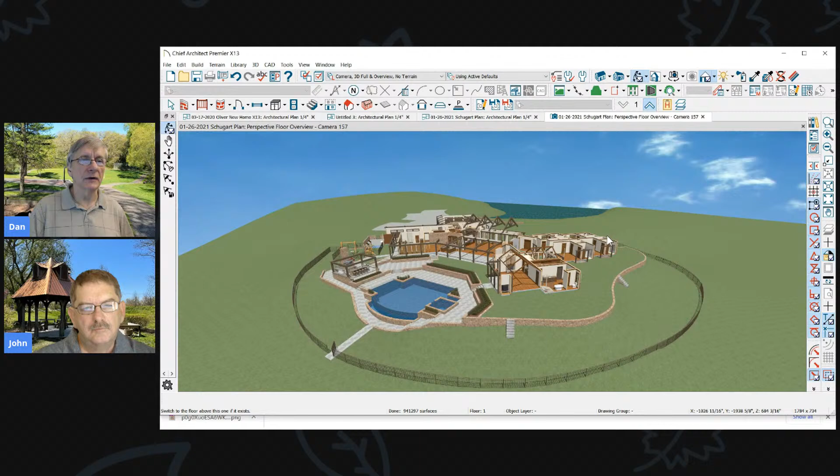It seemed like it did slow down a little bit on some of the 3D stuff, but when I changed materials, things like that - I was just working on an outdoor kitchen on this project - it performs fine. It was getting a little slow on X12. I need to go clean out some pictures and blocks and PDFs I've got in here, but as far as bringing up the 3D stuff, it worked just fine, didn't bother much at all. So there's the model, it goes around fine, and it works. There shouldn't be any problem bringing in the layers from X12 or anything like that.

Couldn't understand you, John. It was kind of windy there.

The last question there, or second to last - oh, should we migrate those X12 layers from X12? Yeah, so far I'll be doing a new X13 template.

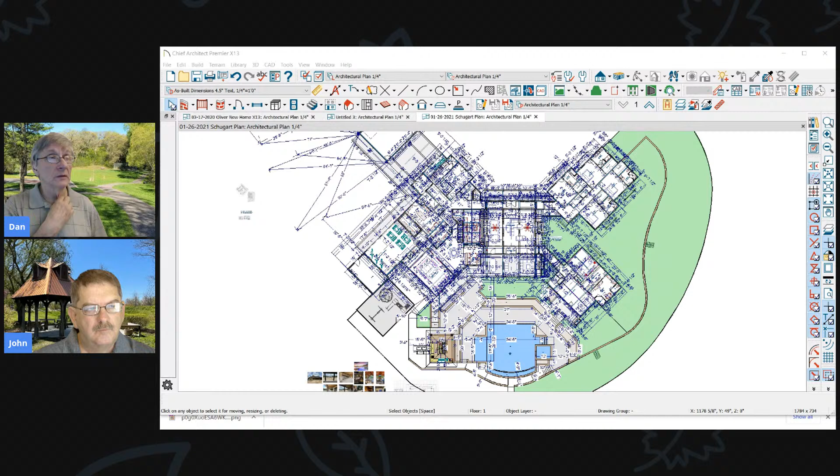If you've been using my template and you haven't made a ton of changes to it, you'll just be able to grab my new template. I've been really waiting on that till they got their final release out, because they did add some new things that would have messed me up. So now I'm ready to go on digging into that. That's going to take some time because I got to go figure out all those new dimensioning setups, and there's a bunch of things I've got to work on.

We're going to start doing some of that over in the ProAcademy too, and we're going to dig into the metric, so we'll get that done. In the meantime, your X12 template will work in it - you just won't take advantage of everything. It'll work fine, yeah, you might have to...

I haven't noticed really much of anything because when I do automatic dimensions, it still works the same as I did before, and I haven't seen any issues. So I wouldn't hesitate - go ahead and migrate and work with it, and then if you see an adjustment to make, open your template and make that adjustment. You'll be good to go.

All right, I'm in the middle of 2 projects and I just upgraded to the X13 beta. Might be risky, makes life more exciting for sure.

Have a great weekend, you won't have any trouble, Mike. I've seen zero issues, and I've always been one to bring my projects into the beta, and I've never had problems. When you open your plan in X13, it will automatically make a copy of the plan into your archives folder for you, so if something did go wrong, don't worry, you'll never ruin the plan you were actually working on. So that's the only issue, so I'd say go for it.